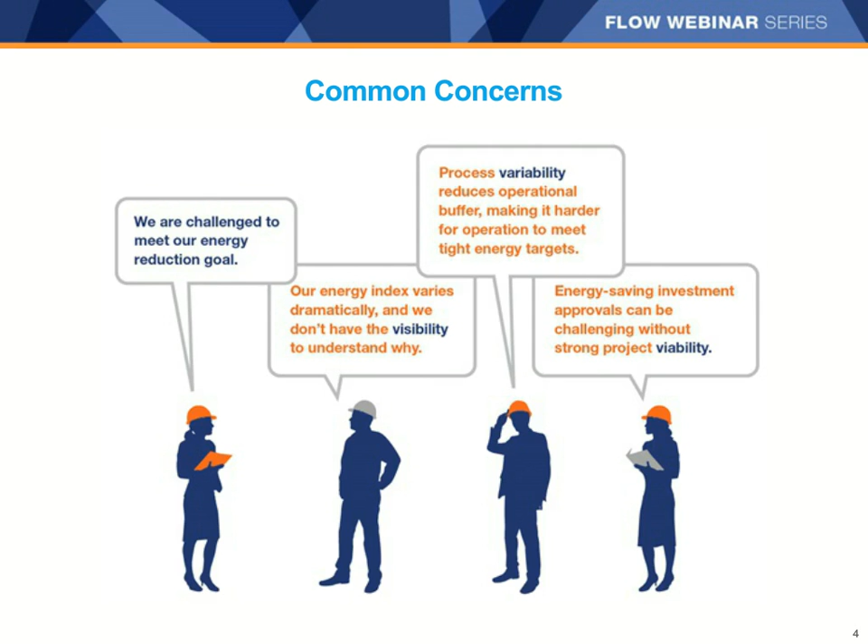So in this first section, I just want you to ask yourself, what if you could gain greater visibility into your plant's energy consumption and loss? Well, who wouldn't want that? Of course, you could verify your energy losses, and then you could take that information that you have about your energy system, and you can set targets and really make a difference in your daily energy usage.

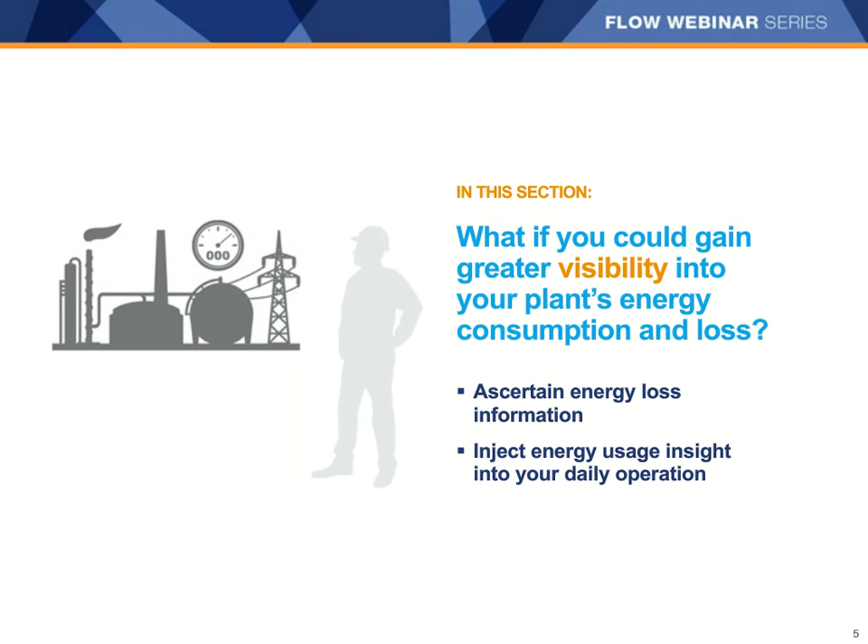Most people do have some sort of energy management information system, but the problem in a lot of cases is that it's really acting as a reporting system with energy consumption based on accounting allocations. So there really isn't any knowledge about who is using the energy, just theoretical calculations that are behind the process. It also gives you information after the fact. So it's like trying to drive while looking through the rearview mirror, and it doesn't tell why the consumption has changed. It's really difficult to figure out root causes of problems when so much measurement is missing.

There are a lot of technologies available to cost-effectively expand energy measurement, and even simply 1 or 2% energy improvement, if you can get that, can mean significant financial benefits for your company. For example, a 2% reduction in energy usage in a refinery is worth as much as $2.6 million a year for a 250,000 barrel a day refinery with fuel costs assumed to be $3 per million BTU.

You've probably all heard the expression that you can't improve what you don't measure, and this is absolutely true for energy management. If you don't have instruments measuring energy usage, it's really difficult to find the areas for improvement. WirelessHART enables energy management that can be cost-effectively installed anywhere. Emerson has a breadth of process measurements and control for energy, including the world's largest portfolio of measurement and control devices and acoustic monitoring of steam traps and pressure relief valves.

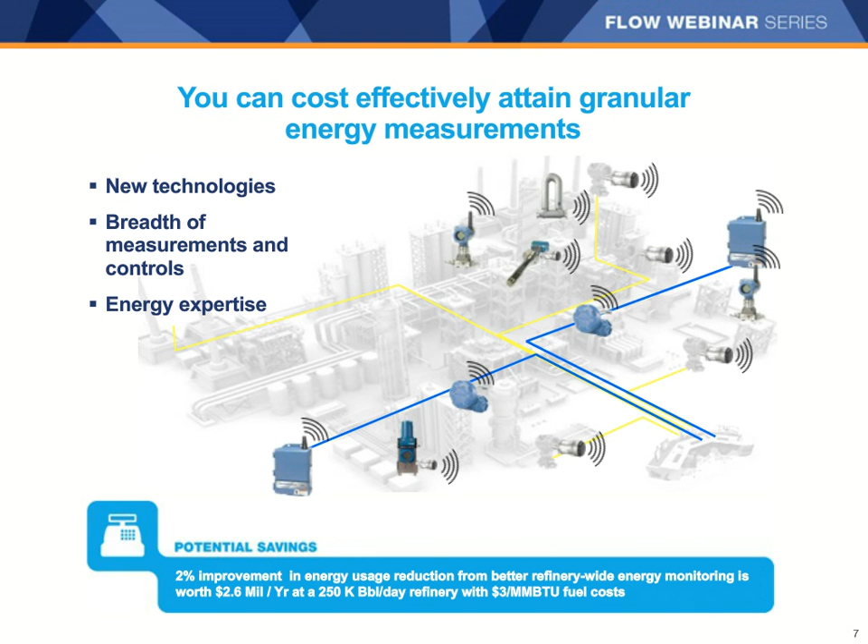Energy Advisor is a real-time energy management information system, or EMIS, that Emerson has produced that automates the process of mapping and managing energy consumption across a site as it is being consumed. Real-time alerts, dashboards, and emails notify decision makers when energy consumption is above expected, and not only that, but it shows actions that can be taken to drive down energy costs. It helps you know what energy consumption should be for a piece of equipment and track energy consumption versus those expectations. It automatically alerts you to overconsumption events and tracks the reasons for those events.

The real-time dashboard of your energy performance helps demonstrate your energy improvements over time. It has some rigorous models built in that help simplify your management. Implementing such a system is likely to uncover plenty of energy savings opportunities.

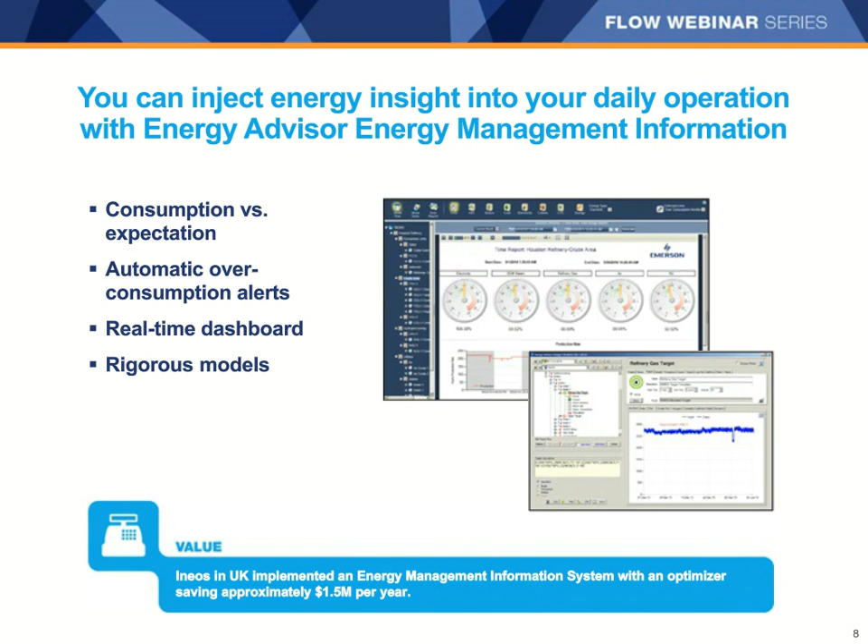Energy management is an important part of your business, and there are opportunities really throughout your plant to save energy. Here's a list of some of the areas that may be available for energy improvements. It's really not uncommon to be able to see 5 to 10% energy savings by implementing an effective energy management system. Each of these areas can be addressed with the Energy Advisor, like I mentioned, and with our energy opportunity surveys. We're going to specifically discuss combustion control as it relates to your boilers and furnaces in just a minute.

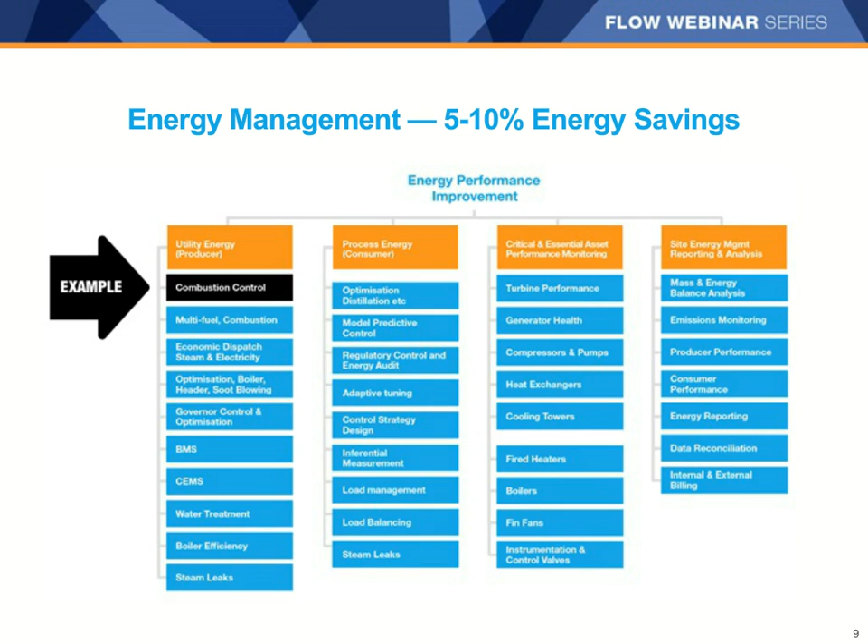But first, I'm going to have a little audience interaction and ask you a question. We'd like to get some input from you. What aspect of energy management do you struggle with most? So we talked about visibility, variability, or viability. If any of those resonate with you, go ahead and pick one of them and submit your answer. Obviously, there are no right or wrong answers. We're just looking for what people think in terms of the biggest challenge for meeting those energy reduction goals.

Looks like we have quite a few answers coming in. I'll give you just another second or two here to answer. So far it looks like a lot of people struggle almost equally with visibility and viability.

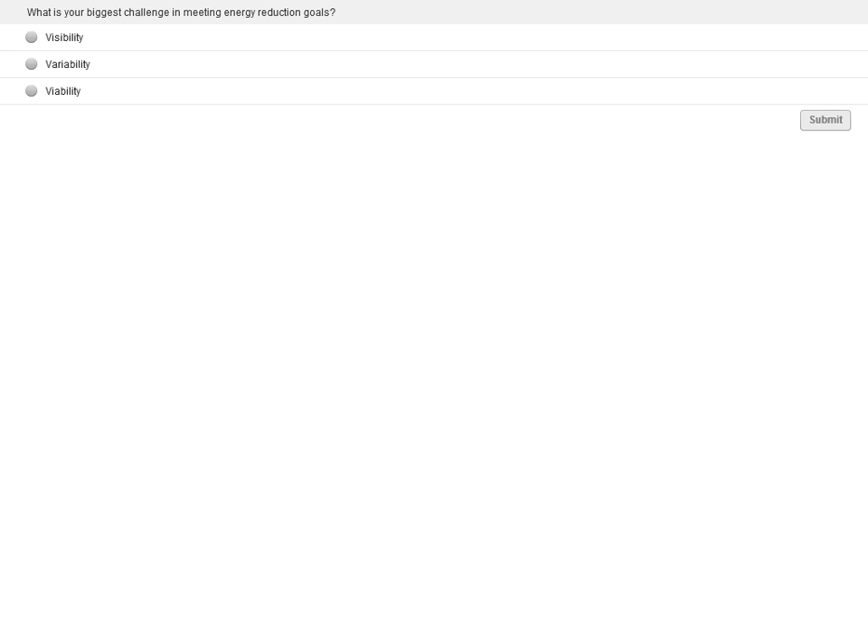Go ahead and look at these answers here. Sorry, I went one screen too far.

So it looks like visibility definitely is a big problem for a lot of people, and so we'll talk about that with some of our instrumentation. And I'm going to turn it over to Julie now to talk a little bit about the variability piece. Okay, thanks, Tanya.

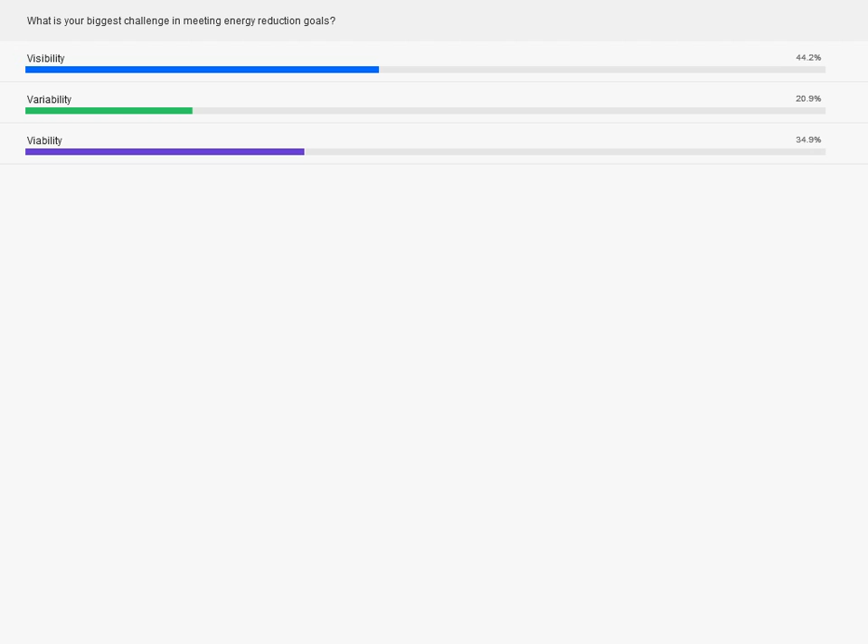Okay, so what if you could reduce process variability and run your operations closer to the optimum point? In this section, we're going to talk about how to achieve that and to push your process constraints to operate your combustion more efficiently. We'll also talk about how fuel measurement can be used to help you comply with greenhouse gas requirements and minimizing the burden of proving and documenting that the accuracy of the measurement is correct for reporting purposes.

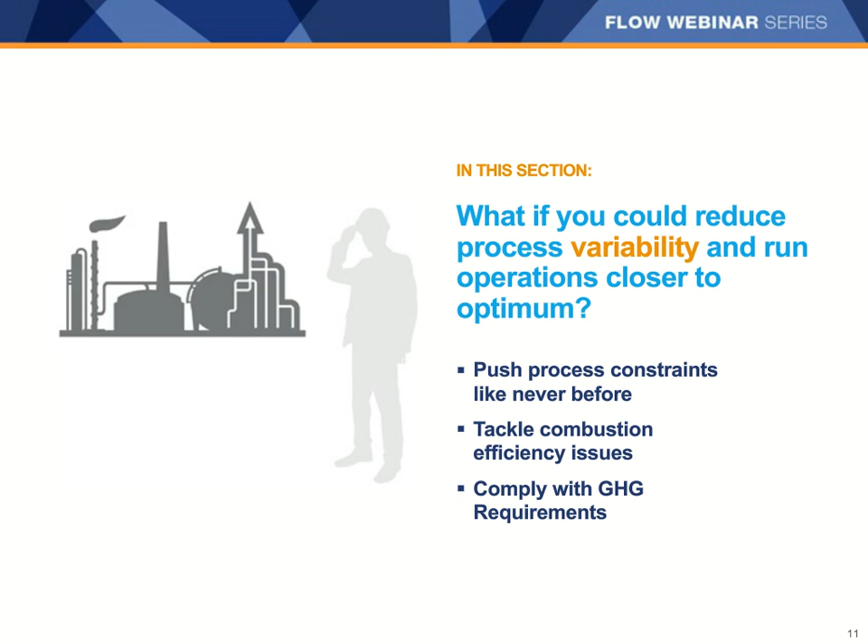With insufficient oxygen, one runs a safety risk with possible shutdown of the furnace or boiler and also emissions issues. With excess oxygen, there's a waste of energy and possible permitting issues. So in the upcoming slides, we're going to discuss the option of safely targeting a lower percent oxygen set point by investing in fuel gas or natural gas measurement and control improvements.

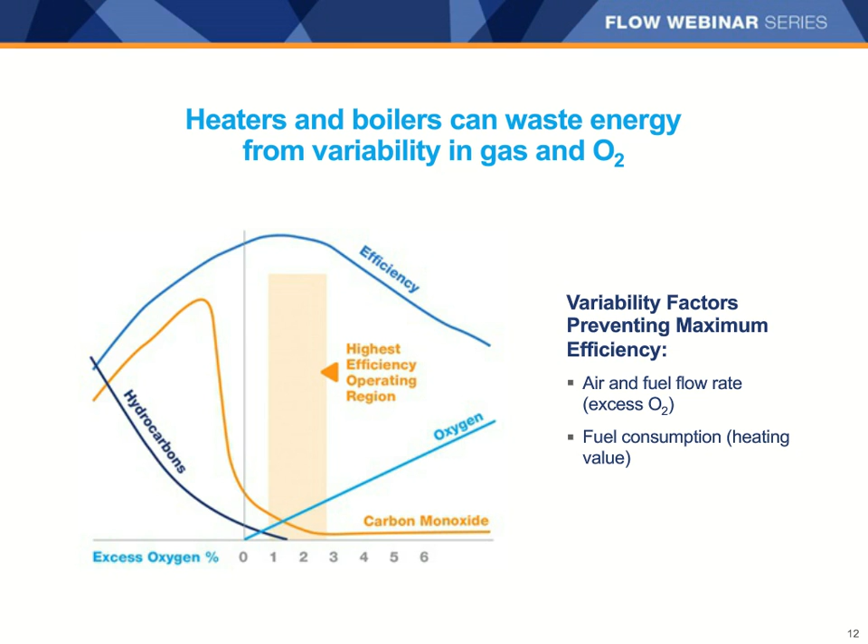So Emerson offers a really holistic optimization solution for fired heaters, which is called Smart Process Heater, which is a BTU-based combustion control system that incorporates advanced measurement and analytical systems along with optimization and control software. But in this presentation, we are really going to focus on the measurement side of that optimization solution.

And one of the measurement devices, which is pretty essential to any fired heater, is the flue gas analyzer. With Rosemount's flue gas analyzer, you can obtain accurate and dependable analyses to look at the combustion efficiency continuously. And these in-situ oxygen and combustibles detectors can help to effectively monitor these components in the flue gas for feedback control.

There are also opportunities to look at the front end of the combustion system, at the fuel gas or the natural gas as it's being fed into the heater or the boiler, and reduce the impact of the variability in the fuel. With Micro Motion Coriolis meters measuring natural gas or fuel gas rates in mass, the impact of composition changes is greatly reduced, as we're going to show you. Additionally, Micro Motion offers a specific gravity meter that can also be used at the fuel gas header to infer the energy content and incorporate that energy content into the control scheme, allowing operation closer to the ideal fuel-to-air ratio.

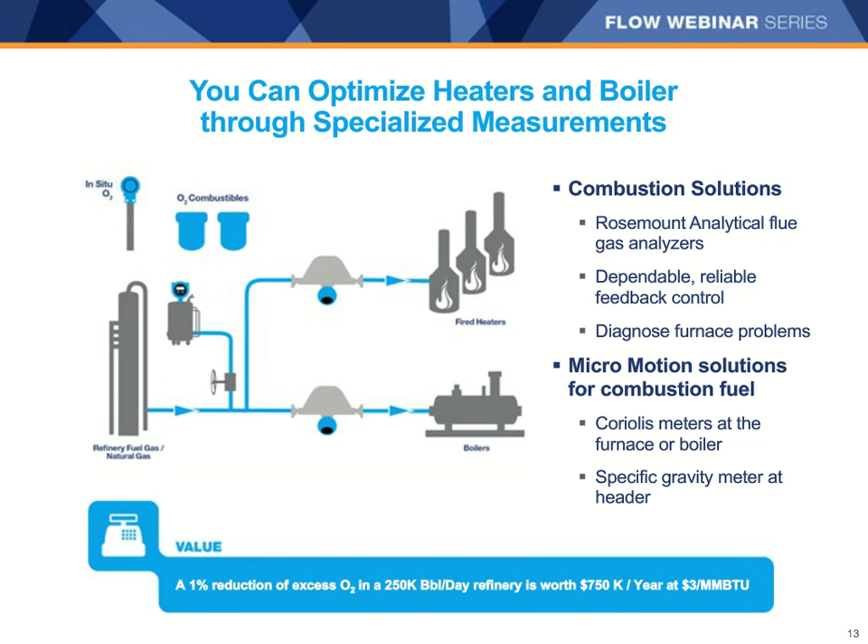So for these very different cases, the variation from the average heat content would be only about 3.8% on a mass basis, as compared to the variation from the average heat content on a volume basis, which would be 14.5%, almost 4 times as much variation.

Now, I've also looked at a lot of different analyses like this in the fuel gas at various different refineries, and I've seen a lot of variation, even much greater than this, on a volume basis. So there's a big benefit.

The same principle applies to natural gas, only the variations are a lot less. So if we look at two sources of natural gas, Amarillo and Ekofisk, we see that on a mass basis, the variation in the energy content is only 0.17%, while the variation in the energy content on a volume basis is 3.43%. So this is more than 20 times the variation with natural gas.

So the bottom line is that if you have varying gas compositions of your fuel gas or your natural gas, you can significantly reduce the impact of the variation by controlling the rates on a mass basis instead of a standard volume basis. The one caveat to this is if there is variation in the inerts or non-combustibles in the fuel gas. If most of the variation in the fuel gas is due to non-combustibles, a mass-based fuel gas measurement won't offer much control improvement, and really a more complex solution is warranted.

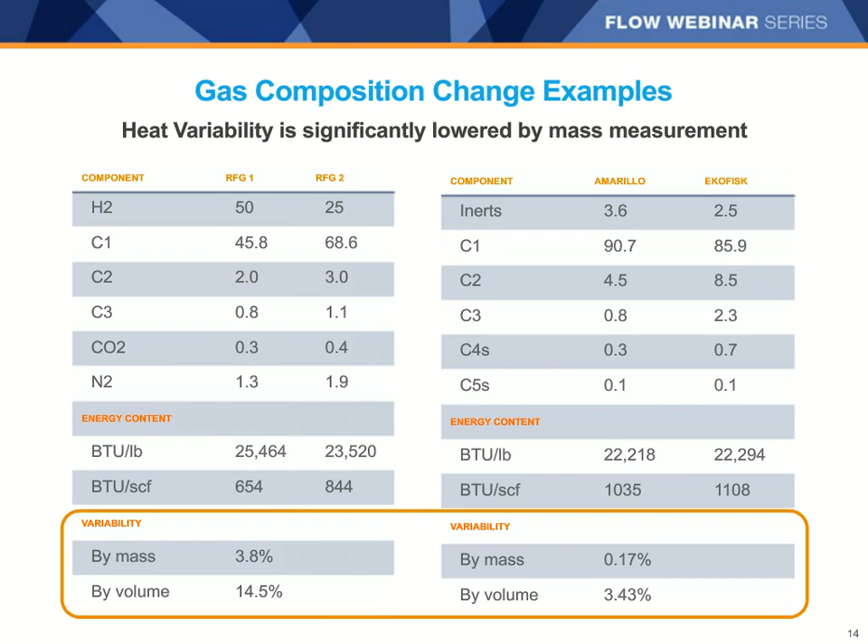Fuel flow is typically measured with DP orifice meters, so it's volumetric flow, and the measurement is heavily impacted by density changes, which of course is really the main problem. So some DP orifice meters are compensated for density changes, but many are not. And fuel stream quality is typically measured with a GC in the laboratory and samples taken at lengthy intervals.

No one, of course, is surprised that the fuel quality can and will change frequently, but will operate with sufficient margin on the combustion air to accommodate these variations. Even though this is a suboptimal way of operating, excess combustion air provides a comfort buffer. And this comfort buffer comes at a cost, though: reduced energy efficiency and even process upsets from rapid changes in the fuel quality.

So the first thing to do to improve fired heater or boiler efficiency, as shown on this slide, is to ensure that you're controlling fired heaters and boilers on a mass basis instead of a volumetric basis. Simply moving from a volumetric-based heating value to a mass-based heating value can reduce control variability by 20 times, as we demonstrated in the previous slide.

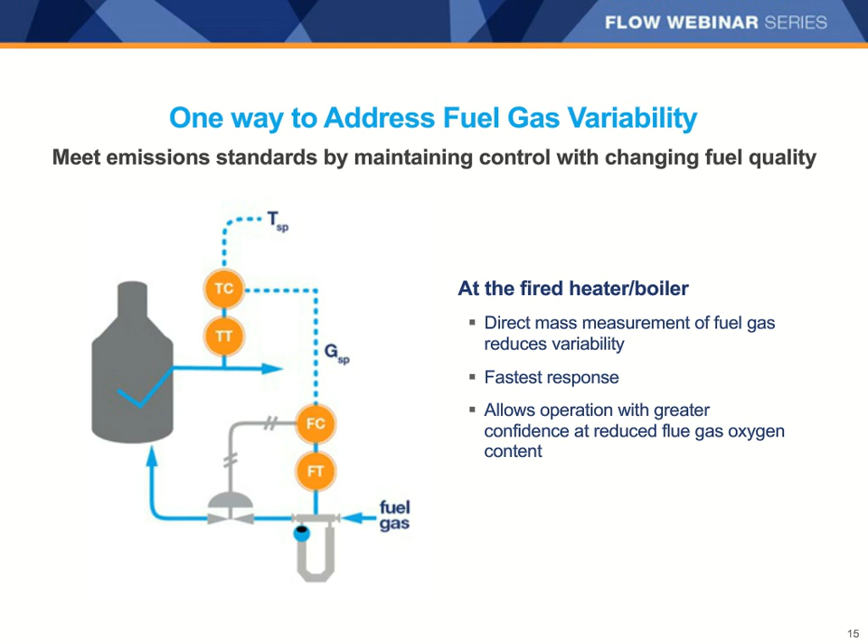In fact, due to the reasons we just discussed, the API is now recommending mass-based fuel measurement on fuel gas to furnaces in their recommended practice document, RP556. The intention is to increase the safety of furnace operation by reducing unplanned shutdowns and restart risks associated with fuel gas composition changes.

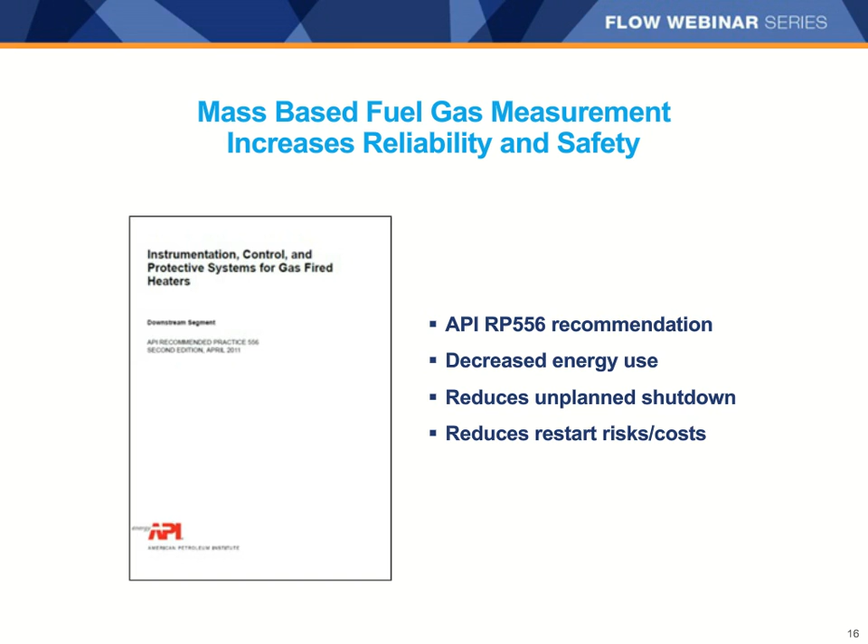Even though we've established that direct mass measurement at the unit is ideal, there are other ways to reduce the impact of varying fuel gas or natural gas compositions. If multiple fired heaters are operated from a common header, the Micro Motion specific gravity meter can be used to get an inferred value for the heat content of that gas. In this way, the energy content of the gas can be measured continuously and fed into the control schemes for multiple heaters and boilers. In some cases, people are using gas chromatographs in a similar way.

The advantages of using the specific gravity meter include lower maintenance than a typical GC and response time in seconds instead of minutes. This device measures the specific gravity of the gas without the need to compensate for pressure, temperature, or gas compressibility. The specific gravity value can be used to determine heating value in the case of natural gas, which is then used with the volumetric or mass flow rate at the fired unit to determine the energy input.

The SGM works well for most applications, but the one caveat is that, again, the inert content should be steady with less than about a plus or minus 2% variation. If you have highly variable inert content, which is somewhat uncommon, the inferred energy can be incorrect since the energy is inferred based on a specific gravity instead of being measured directly.

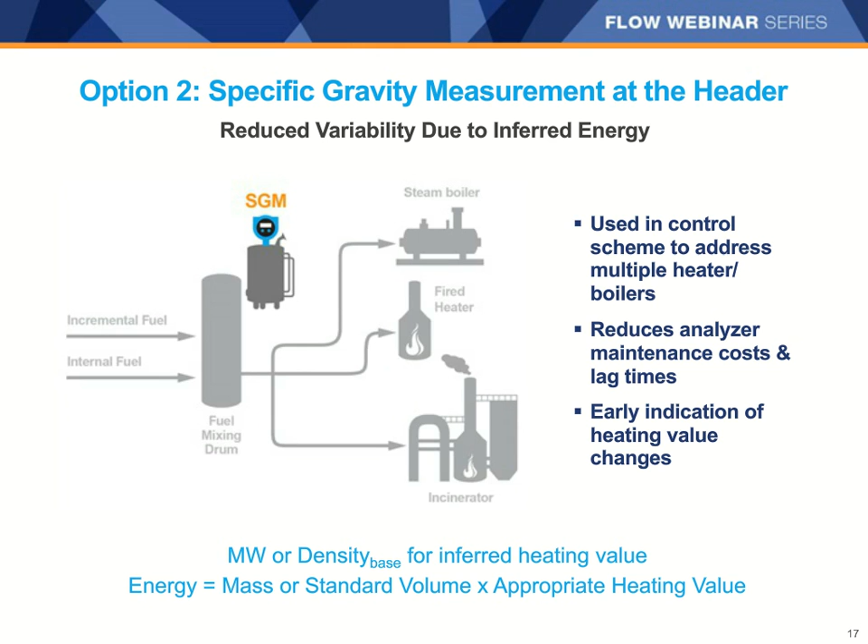Of course, you can use the specific gravity meter along with a Micro Motion Coriolis meter to get the best of both worlds. This will reduce the variability in both the energy and the flow variability for combustion control. As you can see, the SGM would be used with its built-in AGA5-based calculations to determine the inferred mass value

for natural gas. It is more challenging for refinery fuel gas, and a custom-built curve would need to be applied for each case if it was established that there is indeed an acceptable correlation between the specific gravity and the heat content. And in most of the cases we've looked at, there indeed is a very strong correlation. So then the mass flow rate can be multiplied by the mass heating value to give energy flow rates.

And this is a great approach when you have specific heaters or boilers whose design warrants this approach, as is the case with some balanced draft furnaces. This approach also makes sense if you have a complex fuel gas system or extreme fuel gas variations where it's been determined that mass flow alone won't be an effective approach.

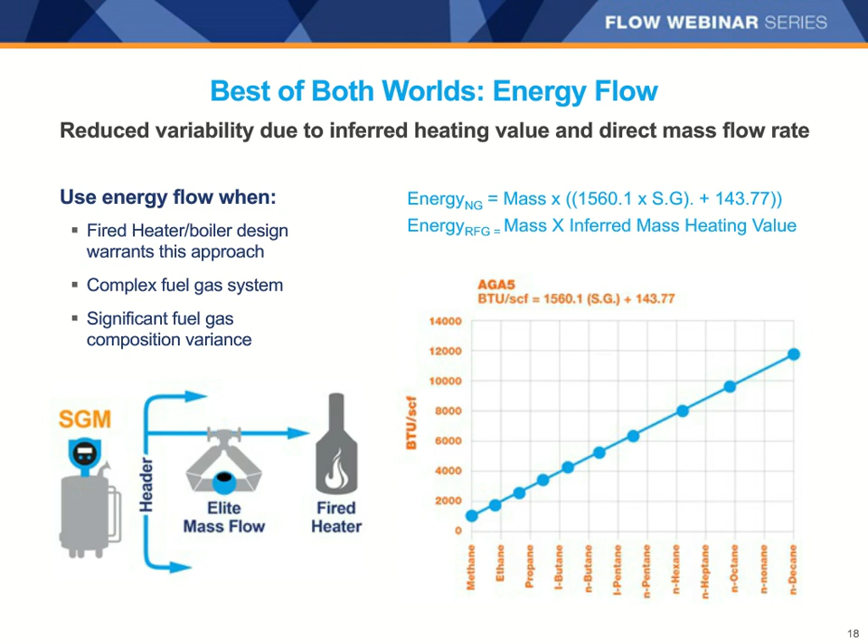There are many different ways to report emissions, and the rules vary depending upon where you are located and what regulatory systems are in place. Some people use continuous emissions monitoring systems, CEMS, for measuring and reporting their emissions. Another commonly used approach is to measure the consumption of the fuel or natural gas and calculate the emissions for reporting. If you're implementing the solution we just discussed of mass measurement of your fuel gas or natural gas, these meters can also be used to report your fuel consumption and calculate the associated emissions.

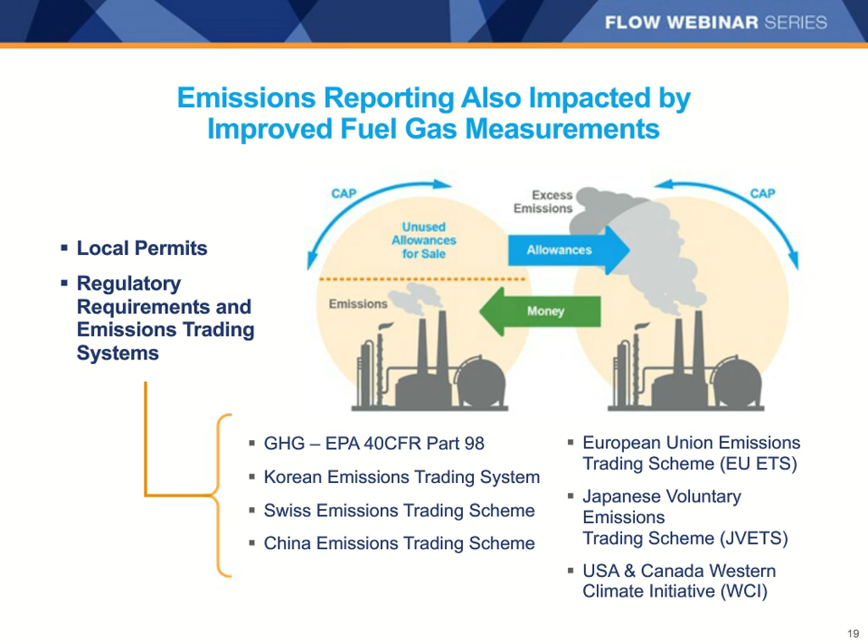The meters have a very large turndown capability and great accuracy, which exceeds the current regulations. They also have built-in diagnostics that can be used in many cases in place of removing meters for calibration to ensure that they're still performing within specification. So when emissions reporting is based on fuel consumption, the accuracy requirement is typically fairly low. It's usually only 1 to 5% accuracy. So you're wondering, why would you need such an accurate meter?

However, it's very important to be able to prove that the meter is performing within the tolerance. And if the system accuracy goes outside of the tolerance, companies can lose their free allowances in cap and trade programs. In larger companies, these free allowances can be worth millions of dollars a year, and the risk of losing those free allowances means that everything possible is done to keep from risking measurement that is close to the accuracy threshold.

So for traditional orifice plates, many regulatory agencies require removing the orifice plates from the line, generally every 1 to 3 years, and taking photos of the plate and keeping those records sometimes as long as 10 years. This is a manually intense process. It's usually performed during a turnaround or a shutdown of the process in what can be a rather intense and chaotic period.

This process is greatly simplified if you're using Coriolis meters for fuel measurement. Many regulatory agencies will allow the use of Micro Motion Smart Meter Verification to take the place of physically removing the meter for checking or calibrating it. Typically, the regulatory body will accept manufacturers' recommendations for verifying the health and the performance of the meter. And in the Resource Center on your dashboard, there are letters that have been specifically written for the EU ETS and for the EPA 40 CFR Part 98 that can be downloaded and used for this purpose.

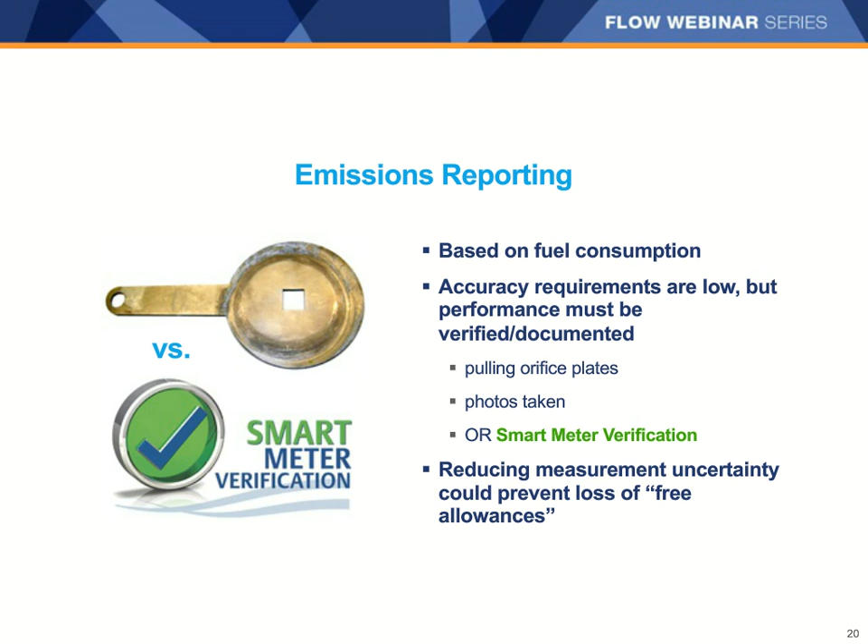So if you are reporting emissions by measuring fuel gas, and it looks like a lot of you are, or you're planning to do this in the future, the Micro Motion ELITE mass flow meters are really an excellent choice for this. As Julie discussed, the direct mass measurement can reduce the impact of variations in your fuel composition, which results in energy efficiency improvements and a reduction in the excess oxygen requirements. The Micro Motion meters offer superior turndown capabilities, and so these are especially helpful when you're feeding multiple units and rates can vary due to online versus offline heaters or boilers.

The mass flow accuracy can't be beat. It's best in the world and gives an extra comfort margin for those greenhouse gas reporting requirements to prevent the risk of losing free allowances. The Smart Meter Verification option allows you to check the meter in minutes without interrupting the measurement at all or exposing personnel to the process. With a convenient printout, greenhouse gas reporting really is a breeze, and it's easy to keep track of those records and turn them in and comply with your reporting requirements.

For low flow applications, we have new diagnostics that help to ensure the best performance is achieved by checking the zero of the meter using a proprietary set of diagnostics and test conditions. Our latest transmitter, the Model 5700, also provides automatic data logging so you can capture any kind of process upsets and analyze them later. The key takeaway here really is that Micro Motion meters offer superior performance under real-world operating conditions with minimal interaction and with world-class diagnostic capabilities.

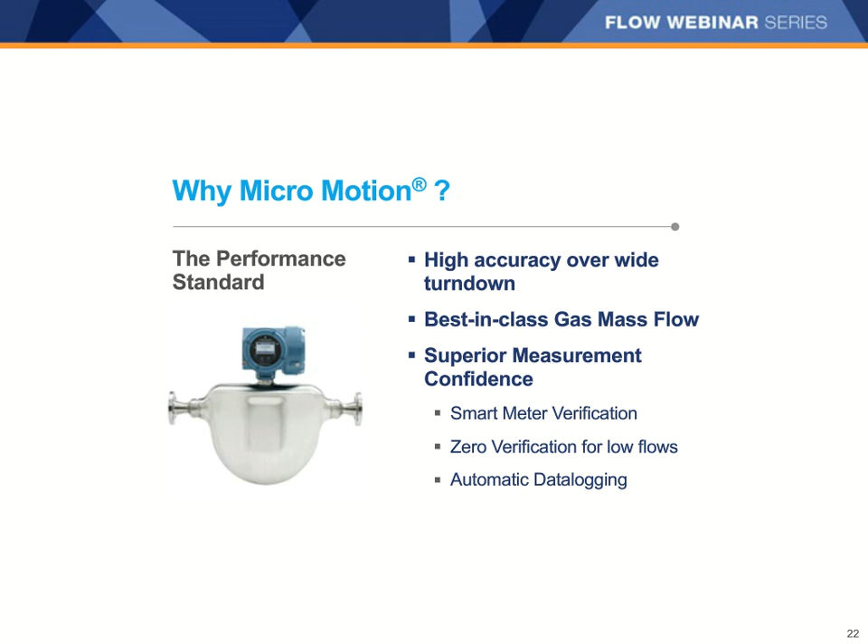But it's not just Julie and I saying that these meters work really well. I wanted to share some success stories that we have. And the first example is about energy efficiency. This customer needed to produce steam for an LCD production process. In order to produce the steam, they were using multiple boilers and burning natural gas.

They needed to have really accurate control of their natural gas and their air to make the boiler as energy efficient as possible and to keep emissions to a minimum. Their existing gas flow meters used fixed pressure, temperature, and compressibility, or PTZ compensation, which resulted in some inconsistent steam production. This, of course, caused some issues downstream, and they were also spending about $100 million per year for energy, and obviously wanted to reduce those costs if possible, but they still needed to comply with greenhouse gas regulations.

So remember from our earlier discussion that combustion with excess fuel can be dangerous and can cause some safety shutdowns. However, if there's too much air or oxygen, the efficiency decreases significantly, increasing your energy costs as well.

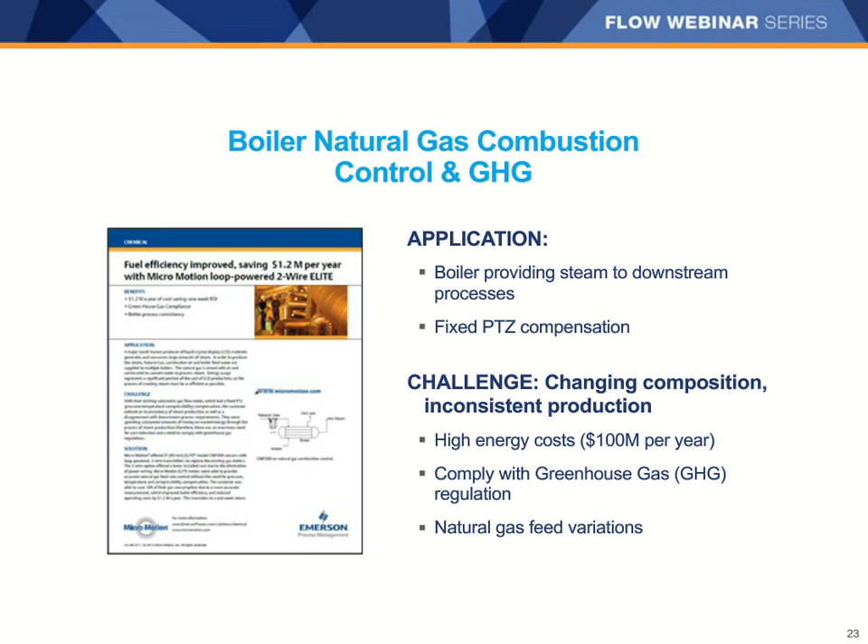So the customer chose to implement a 3-inch Micro Motion ELITE sensor with a 2-wire transmitter to replace their existing gas meter. They chose 2-wire just so that they wouldn't have to use additional cables and put extra power wiring in there for the application. The ELITE meter was able to provide accurate natural gas feed rate control without the need for pressure, temperature, and compressibility compensation.

And the customer was able to save 10% of their natural gas consumption by improving the boiler efficiency, which ultimately reduced their operating costs by $1.2 million per year. This means that the Coriolis meter was paid for in just 1 week. So how's that for addressing that viability question? They also benefited from lower maintenance, more consistent steam production for downstream processes, and they were able to meet all of their greenhouse gas regulations and reporting requirements.

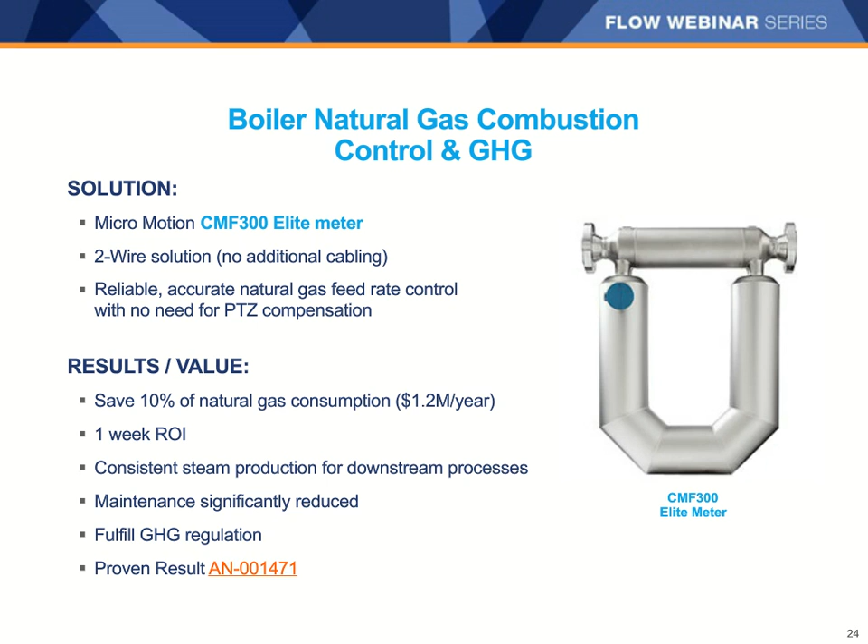A number of our refinery customers are also using the Micro Motion specific gravity meter for gas to identify sudden changes in the refinery fuel gas composition. For this customer, the rate of change in the hydrogen concentration in the refinery fuel gas was really fast, and so they were concerned about lag times between analyzing that composition change and notifying operations of the change. Although a process chromatograph was considered, they had concerns about the sample loop and analysis lag times. They were worried about the capital cost and the added cost of maintaining this type of analyzer.

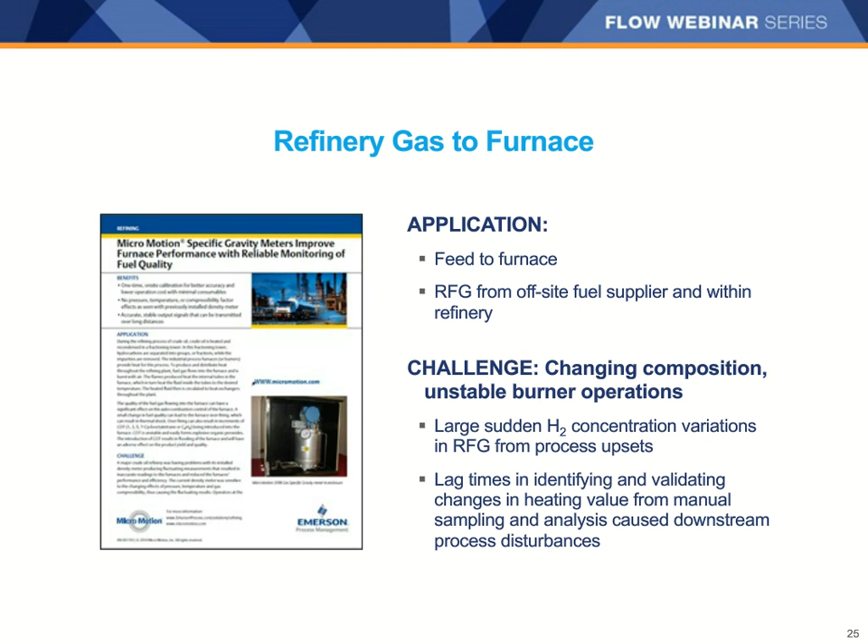They ended up installing a Micro Motion gas specific gravity meter and calibrated it with hydrogen and pure methane and utilized the specific gravity output as an inferred change in heat value of the refinery fuel gas. The results that they saw, they were able to reduce their furnace trips, lower emissions, and improve efficiency due to improved fuel-to-air ratio control to the furnace. They didn't incur the extra costs associated with using a GC, including the higher capital installation and maintenance costs.

And prior to the installation of the specific gravity meter, the wide swings in heating value were also causing operations to frequently open and close the control valves on several fired units. This contributed to even more pressure swings in the fuel gas delivery system, and added to the problem of control during these large changes in heating value.

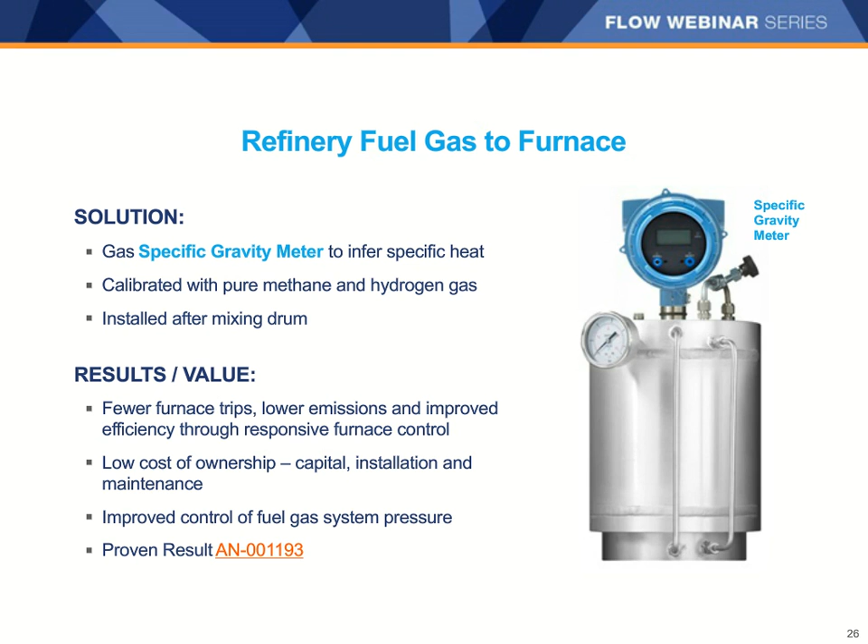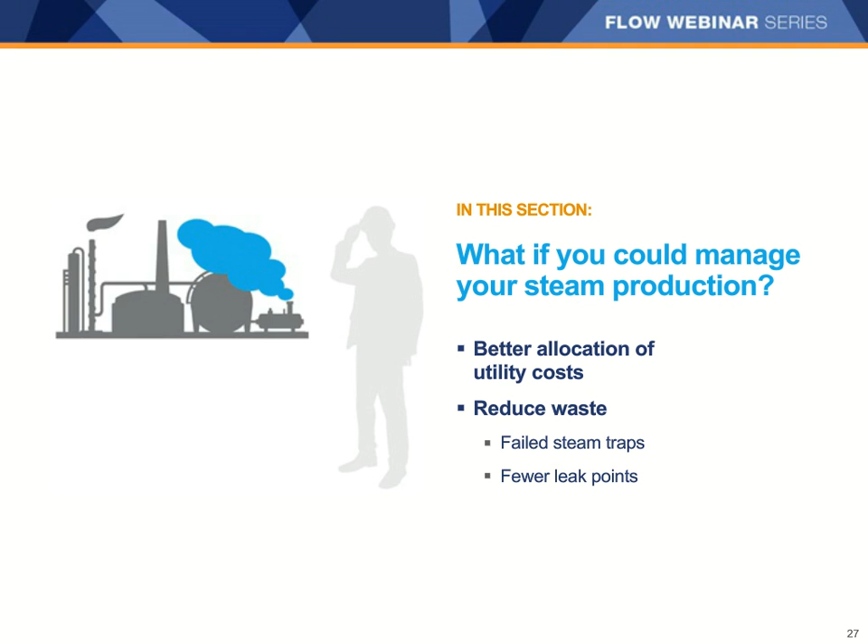As I mentioned in the agenda, we're also going to talk a little bit about managing your steam system. So having a good idea of where your steam is going can help you better allocate actual utility costs and can reduce waste as you gain visibility to failed steam traps and eliminate potential leak points in your steam system. In most plants, steam is produced on-site using multiple boilers and then distributed to various process units using an overall steam distribution system. The number of flow measurement points in the systems can vary dramatically.

Some plants allow steam really to just be used by any unit as needed, and then they allocate costs of the utilities based on formulas, and they regulate their supply steam as much as possible fairly manually. On the other end of the scale, some plants have steam flow meters dedicated to all their boilers and distribution points. This is ideal because it helps to more quickly identify points of high steam usage, potential leaks in the system, inefficient boilers, and other areas where energy is being wasted. It also helps manage your supply based on your usage.

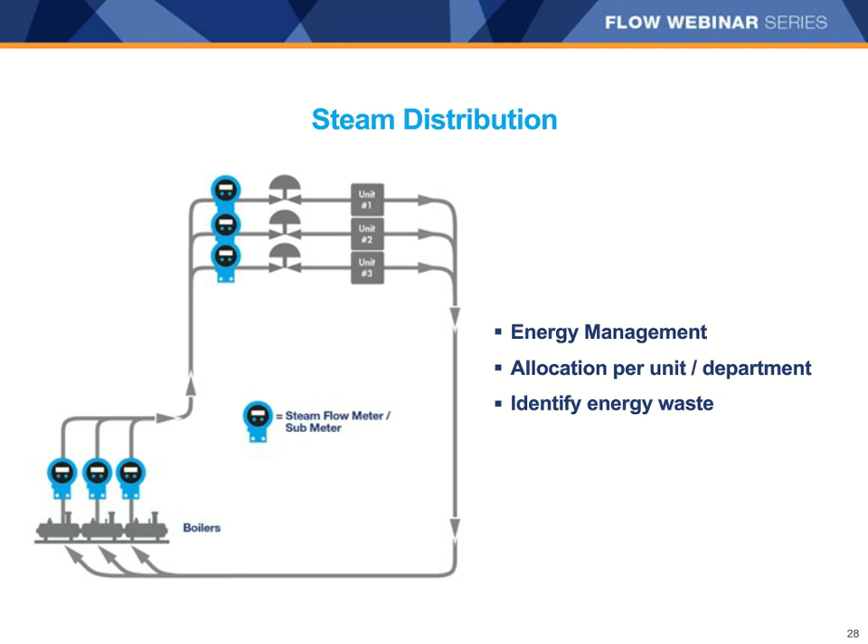The Rosemount 8800 Vortex meter is an ideal meter for measuring steam. The unique Rosemount design is unlike any other Vortex meter and has absolutely no ports or crevices to plug and no gaskets to replace. The all-cast design significantly reduces potential leak points, and when compared to traditional orifice plates, the Vortex meter eliminates the impulse lines that can freeze in colder weather and interrupt measurement.

The Model 8800 Vortex meter has the option to have a built-in temperature measurement that can be used for saturated steam, and that way you can directly output a mass flow rate of the steam without the need for a flow computer or any additional wiring. The unique Rosemount design allows the sensor or the thermocouple to be replaced without removing the meter body or exposing the process fluid. The Vortex meter also has a meter verification option that allows you to check the health of the meter without shutting down the process.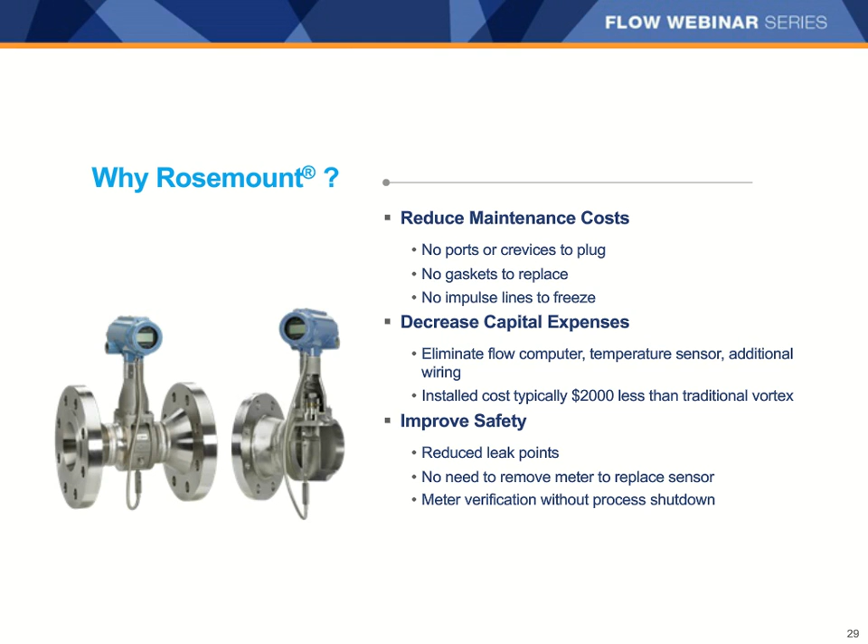I want to share a little bit about how one petrochemical plant improved their steam distribution network using the Vortex meters from Rosemount. They had 9 thermal boilers that they used to produce superheated steam for the plant. The steam was distributed using 3.5 kilometers of steam piping. Steam was important to the plant because their end product quality relied on constant steam pressures in the distribution system. They were originally using 3 orifice meters to try to manage the network. These meters had issues with leaks and were consuming about 300 hours of maintenance per year.

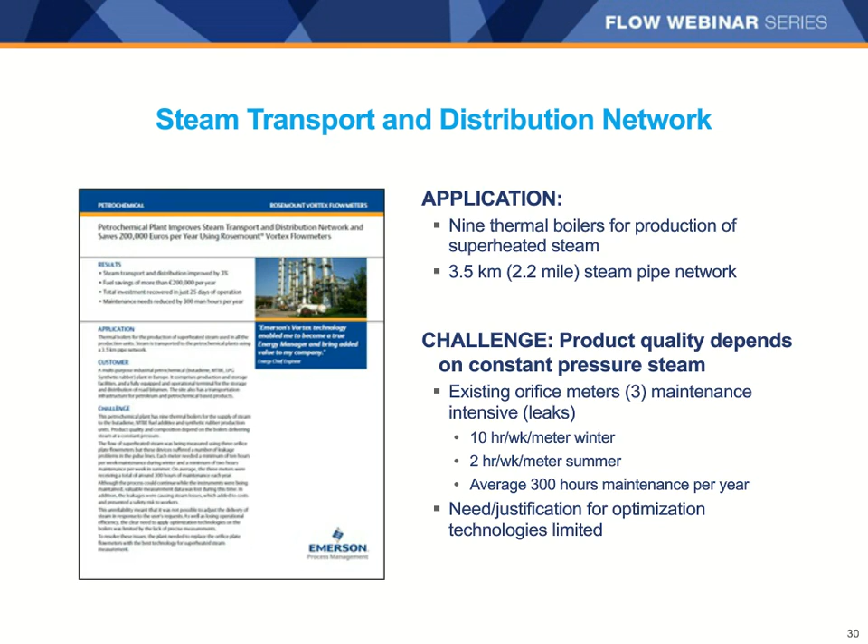However, it was easy for the steam meters to fall below other more important projects for the plant, so they really needed to be able to prove a strong return on investment to get funding. This is again talking about that viability aspect that we discussed early on, and it looks like some of you definitely struggle with that justification of these projects. So they ended up choosing the Rosemount 8800D Vortex meters with the integral temperature sensor option, and they added pressure transmitters and a flow computer so that they could output mass flow of the superheated steam.

They immediately noticed significant reduction in maintenance because leaks were eliminated, and it resulted in a 3% steam system efficiency improvement and saved them more than 200,000 euros per year in fuel. The return on investment indeed proved worthwhile, and the project paid for itself in less than a month.

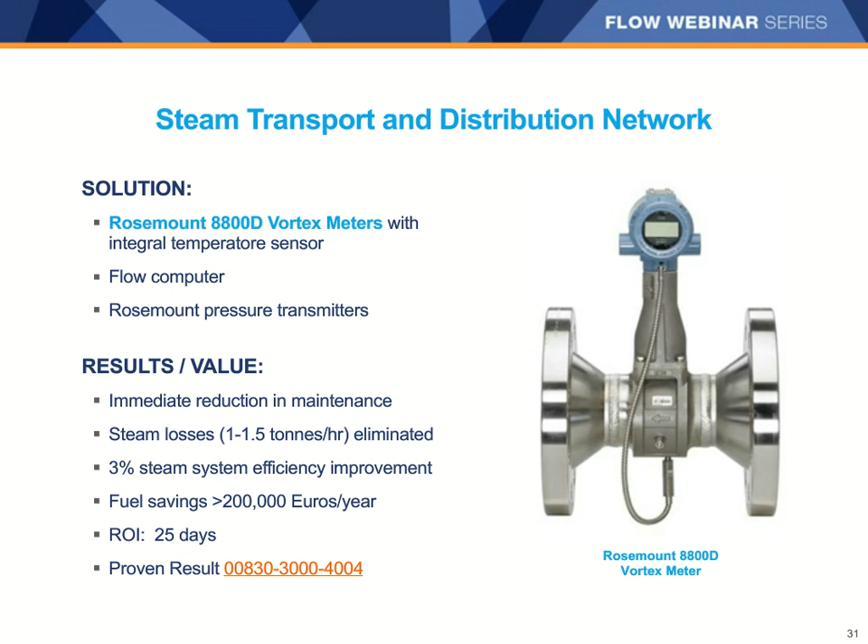Another area that gets commonly overlooked in a utility system from an efficiency point of view are the steam traps. Steam traps that aren't properly maintained can often have leaks that go undetected and are a direct waste of energy. Manual inspections are expensive and time-consuming, so they usually aren't done as frequently as they might need to be. Fortunately, Rosemount offers an acoustic transmitter that can detect steam trap failures. We also have an online energy savings calculator that helps estimate potential energy savings and helps you prioritize the steam traps that could save you the most. It also calculates your inspection savings.

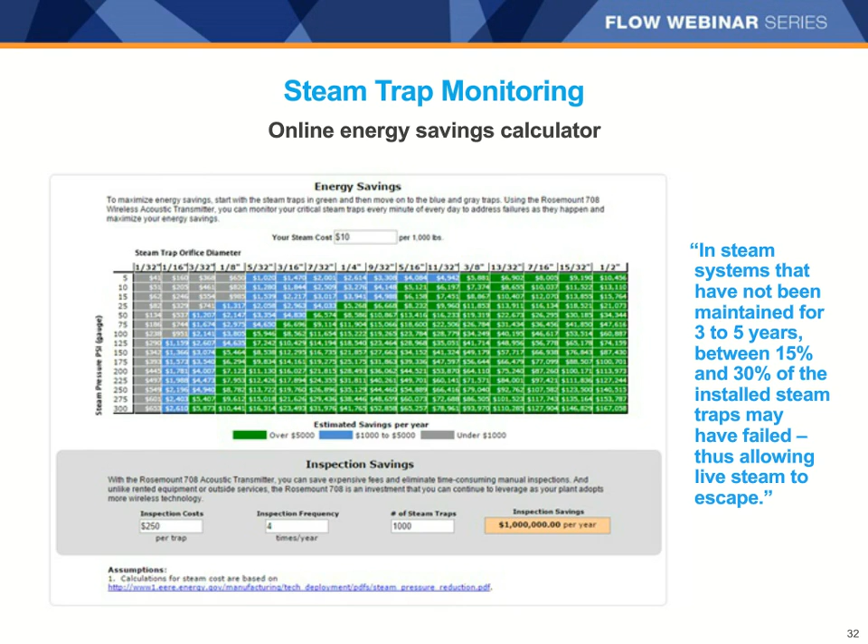The Rosemount 708 wireless acoustic transmitter is fast and easy to install and immediately provides real-time visibility to steam traps, indicating any failed steam traps. Armed with this information about your steam traps, it's easy to prioritize and take actions to improve the problematic traps and reduce fuel costs from wasted steam. The device really is a set and forget instrument that's non-intrusive.

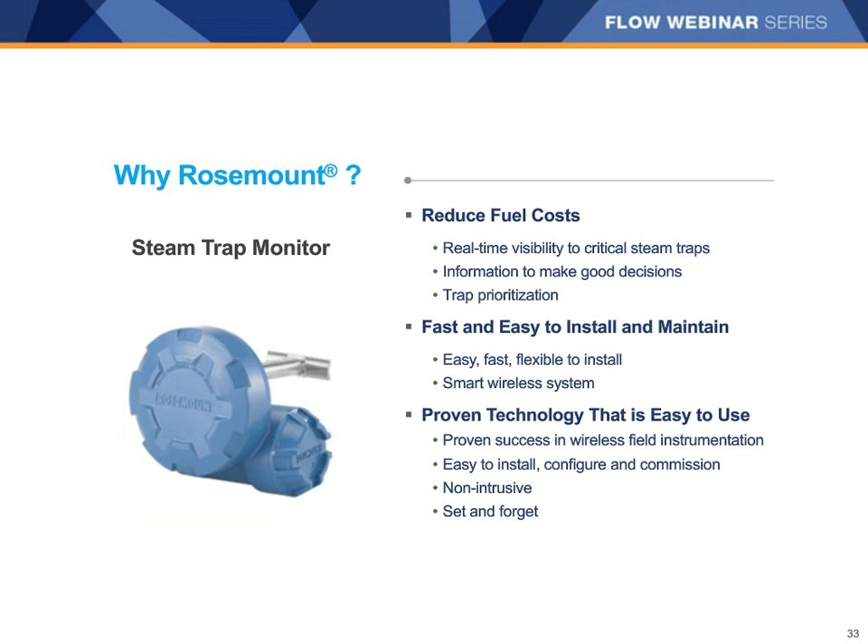We've talked about a lot of different opportunities for improving energy efficiency today, and there are even more that we haven't had a chance to discuss. So in the Resource Center on your dashboard, there's a link to something we call the Energy Schematic, and it helps you identify some additional opportunities that we didn't address during this webinar.

But let's go ahead and wrap up the webinar information for now. And I just want to remind you that Emerson, if we are your measurement partner, then we can definitely help you improve your energy systems to operate more efficiently, reduce your costs and emissions, and all the while helping to ensure safety and compliance.

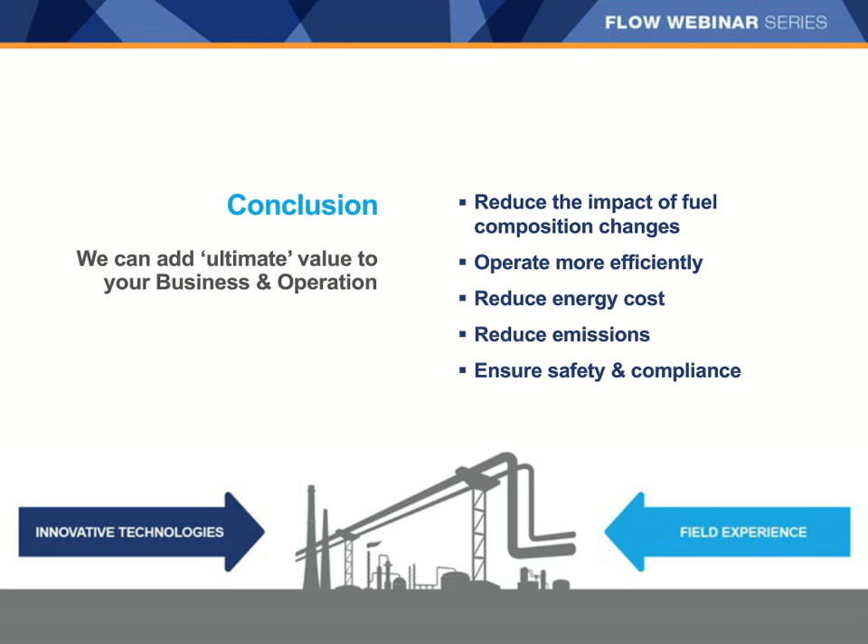We have best-in-class measurement devices and a vast amount of field experience that we can use together to really make a difference for you.